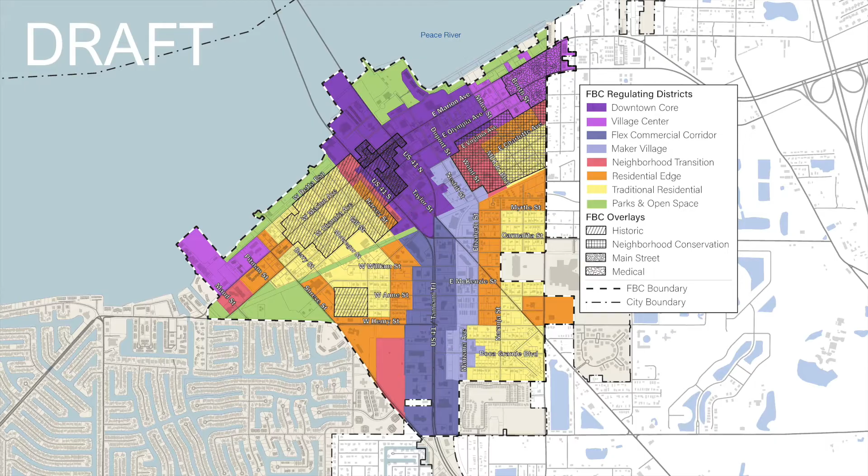Now, I'm sure you're wondering what a regulating plan is. Let me show you. A regulating plan is just a more fine-grained version of a zoning map, which defines regulating districts, overlays, and sometimes open space and street types. The following map series shows the draft regulating plan for Punta Gorda's new form-based code.

Keep in mind that the form-based code covers only the traditionally platted and historic neighborhoods in and around downtown Punta Gorda. We'll go through each regulating district one by one, describing the overall intent and key characteristics as we go. Let's get started. The downtown core is the traditional commercial center of Punta Gorda.

This district accommodates the most intense urban development in the city, serving not only the residents of Punta Gorda, but also nearby communities and visitors. The area features mixed-use and multi-story buildings that actively engage streets and sidewalks to promote public gathering and support vibrant retail, dining, and commercial spaces.

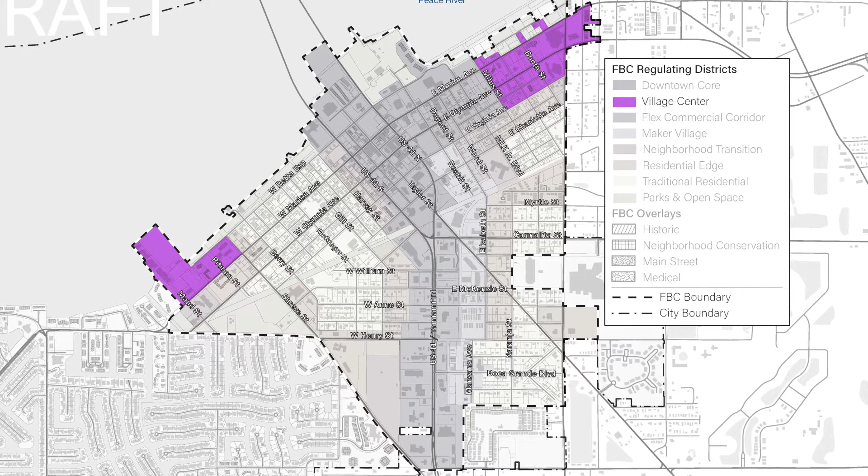Village centers are compact and mixed-use areas that provide a range of residential, commercial, and office uses, which not only serve the needs of those living there, but also the needs of adjacent residential neighborhoods. Development patterns are intentionally urban, with street-oriented buildings that create a vibrant, walkable environment, though at lower intensities than those permitted in the downtown core.

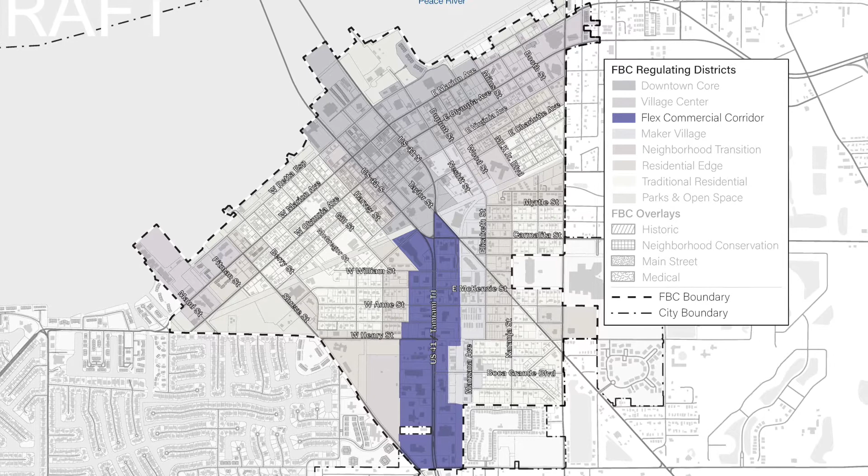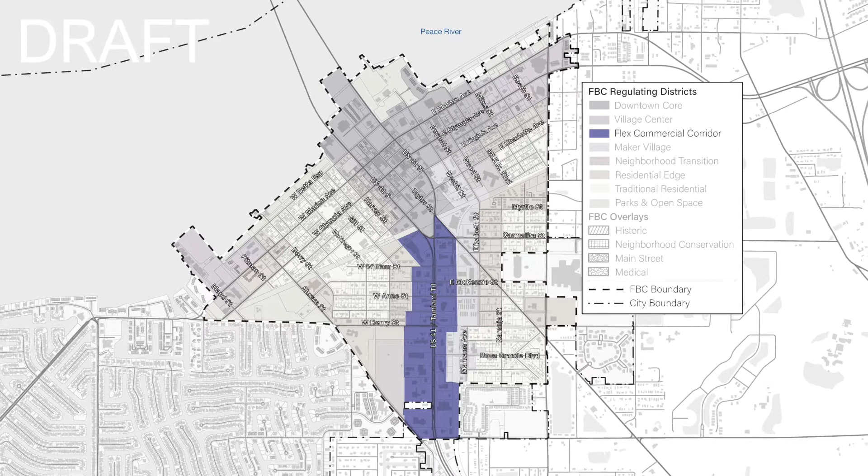The Flex Commercial Corridor is intended to accommodate the highest flexibility of uses in Punta Gorda, supplementing existing highway-oriented commercial development as the market demands. New street-oriented and mixed-use buildings will facilitate walkability and create a more welcoming gateway and seamless transition into the downtown core.

The Maker Village is an area that includes clusters of light industrial, artisan, and production, distribution, and repair uses. New live-work lofts and small-scale shopfront and multifamily buildings complement existing one- and two-story warehouses to create a unique and complete working neighborhood.

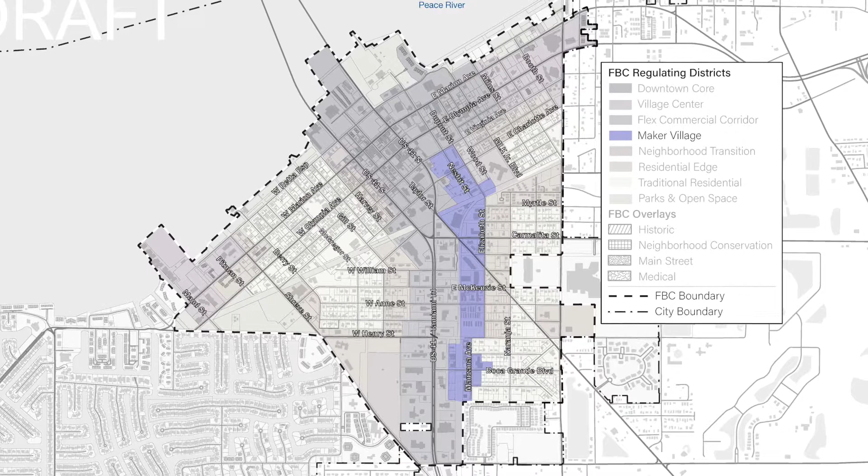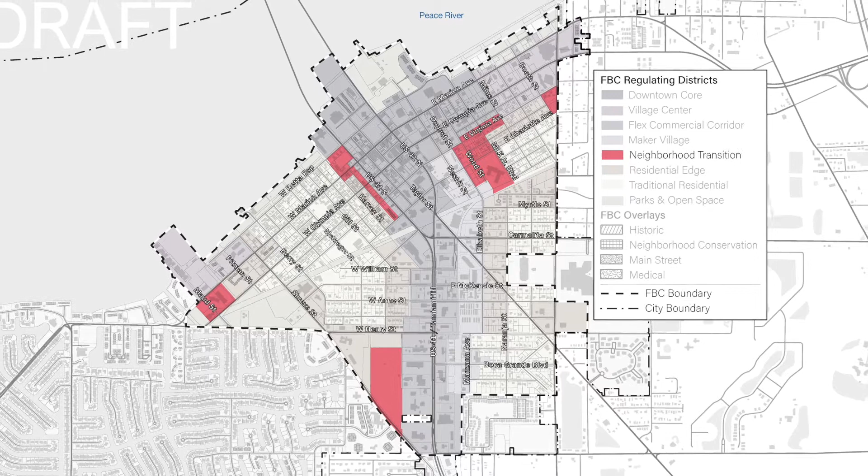Neighborhood transition areas provide a similar variety of uses as the downtown core and village centers, though at scales more closely matching the surrounding residential neighborhoods. Buildings within this district range from shopfronts to multiplexes to single-family houses, creating a deliberate transition between the highest intensity mixed-use districts and the lowest intensity residential districts.

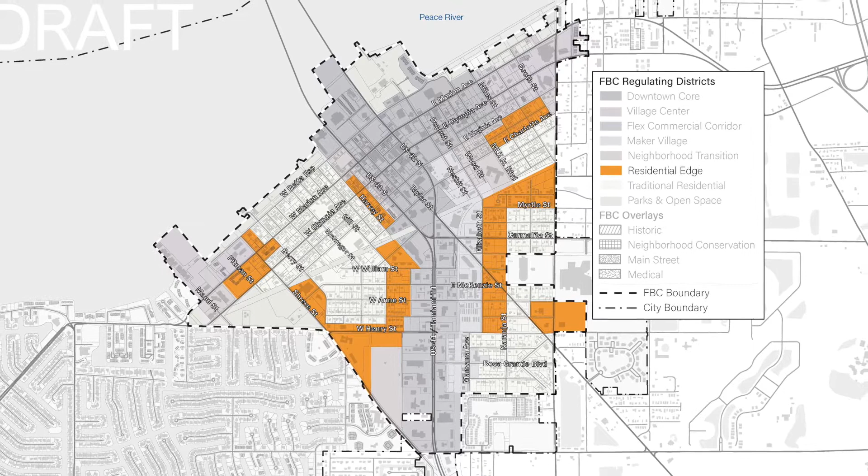Along the borders of the traditional residential neighborhoods are residential edge areas that accommodate a more diverse range of residential building types, including row houses, triplexes, fourplexes, and multiplex buildings. While these areas allow for slightly higher density residential, the overall scale of the buildings still blends with those of the adjacent traditional residential areas.

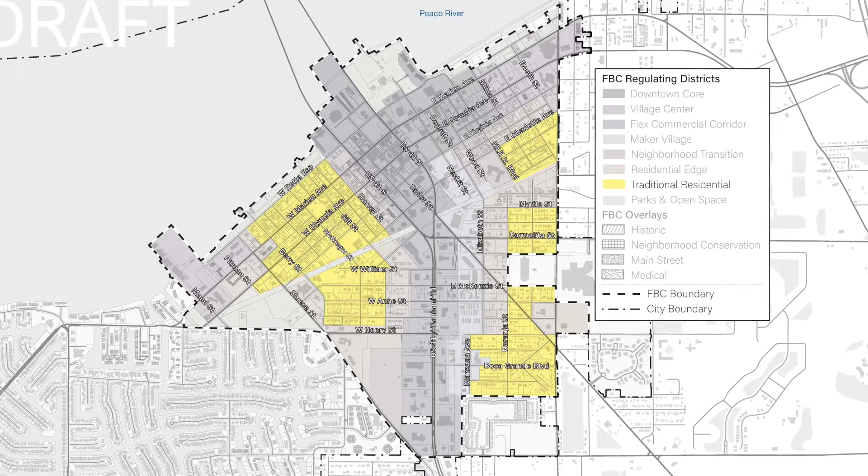Traditional residential areas are the one- and two-family home neighborhoods of Old Punta Gorda. These areas are characterized by detached single-family houses and duplexes on compact and regular-sized lots that feature traditional elements like porches and porticos, which enhance the quaint and walkable character of the city.

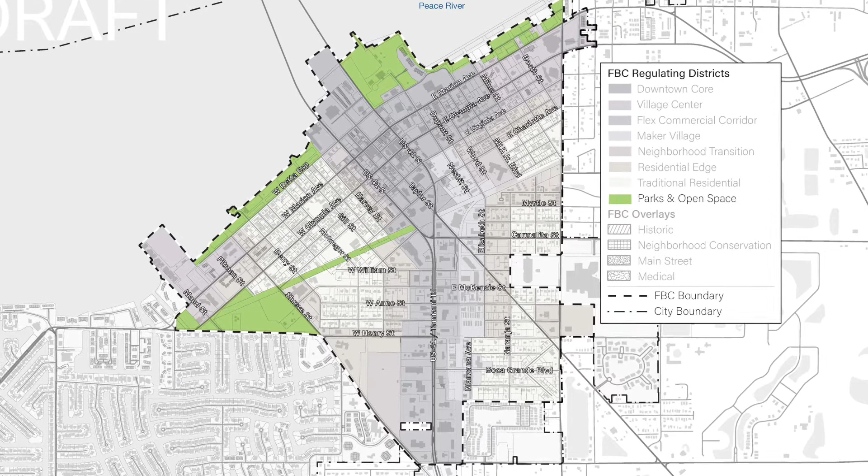Parks and open space encompasses those lands owned by the city with a primary purpose of providing park facilities and public open spaces for the benefit of the community. City Council will set development standards for these areas on a project-by-project basis through the city's Capital Improvements Program, in alignment with the adopted Comprehensive Plan and Parks and Recreation Master Plan.

That is all we have for this video, but if you watched the last video, I asked you all how tall you think the Charlotte County Justice Center is, including stories in height. The answer to the trivia question was 5 stories and a height of 114 feet.